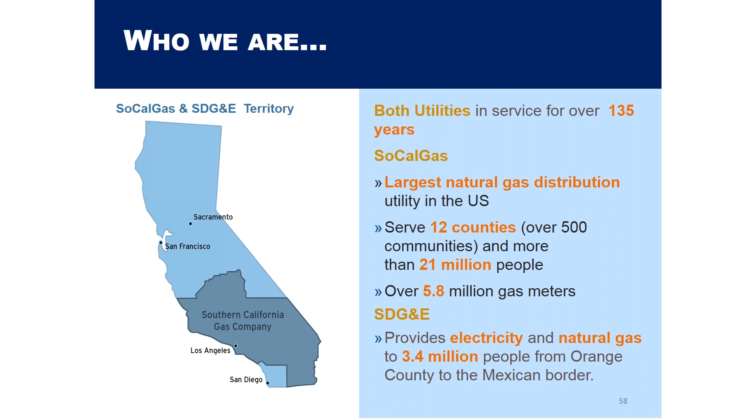Okay, so I'm going to first talk about who we are, give you some context, talk about RNG basics, which we've kind of covered a little bit today already, the case for RNG, and describe some of our projects. So who we are. We're the biggest, baddest, most bionic utility in the nation. Okay, so we serve almost 6 million customers. We've been in business over 135 years. We're old. And we have both San Diego Gas and Electric and SoCal Gas. We're basically the bottom half of the state. The top half of the state is typically PG&E, our friend in the north.

Okay, so let me give you some context here. So, everybody knows California is leading the nation in terms of our climate goals. In September, Governor Brown just signed SB 100, which bolstered the renewable portfolio standard to go from 50% renewable electricity by 2030 to 60% by 2030. We also have what's called SB 1383, which is a focus on the short-lived climate pollutants, which methane, of course, is one of, along with black carbon, the fluorocarbons, the refrigerants. The goal is to reduce methane emissions by 40% from 2013 levels.

So that's the main policy driver there. The governor signed an executive order recently that says we're just going to transform the whole economy. By 2045 - we have to beat Paris 2050 by 5 years here - we're just going to transform the economy and go carbon neutral by 2045.

So that's what's happening in California right now. So okay, how are we going to get there? Well, we need things that are scalable and affordable to solve these issues. The wind, the solar, the hydro, albeit way more sexy than gas, is not going to solve it. We need to have some renewable natural gas, and somehow we're going to have to make it sexy.

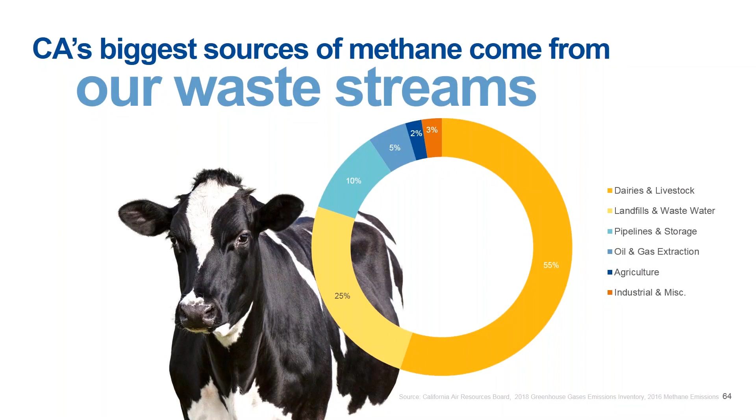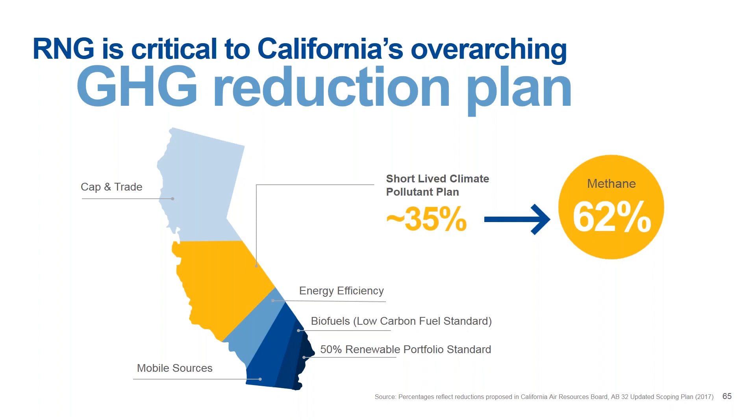So RNG basics, let's take a closer look. This is pretty simple, right? We're going to capture methane from the dairies, from the landfills, and move it into an anaerobic digester that will process it so it can meet pipeline quality specs and get it into our pipeline. So that's what we're trying to do.

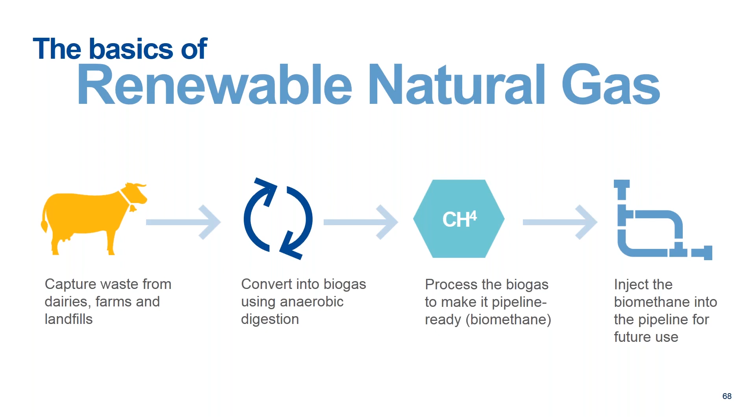We talked a little bit about this already, these terms that are flowing around. What is renewable natural gas? We say renewable natural gas is the methane produced from renewable sources like digested organic waste and gasified biomass. A lot of the inventories of what's available for renewable gas do not include the biomass, the forests. There's 130 million dead trees in California because of the drought, and none of that is being included in the potential for biogas or RNG in California. But there's some significant opportunity there.

Renewable gas - just calling it renewable gas - why do we want to do that? Because we do anticipate hydrogen. The hydrogen highway in California is real, we're trying to put in 200 hydrogen stations. We see an opportunity with power to gas. We talked about that earlier.

Power to gas is a way to convert excess renewable electricity that's being wasted today. In California, we are wasting and curtailing excess renewable electricity that's being generated during the day when there's no demand, and we want to convert that excess renewable electricity into a gaseous form - hydrogen, namely - or convert it back into methane and make renewable natural gas and put it back into our system.

Biogas is a biofuel that is naturally produced from the decomposition of organic waste during anaerobic digestion. Until biogas is processed to state pipeline standards, it's not considered renewable gas. Biomethane is biogas that has been cleaned to state standards and converted to biomethane, or renewable gas. So those are our definitions floating around, and we've heard some other concepts around that, but that's how we define it.

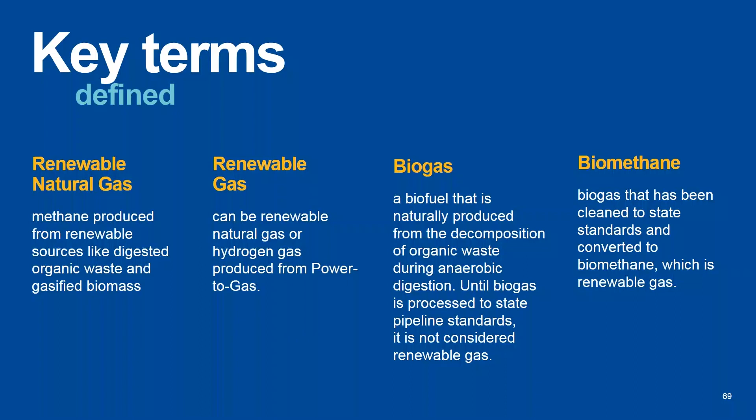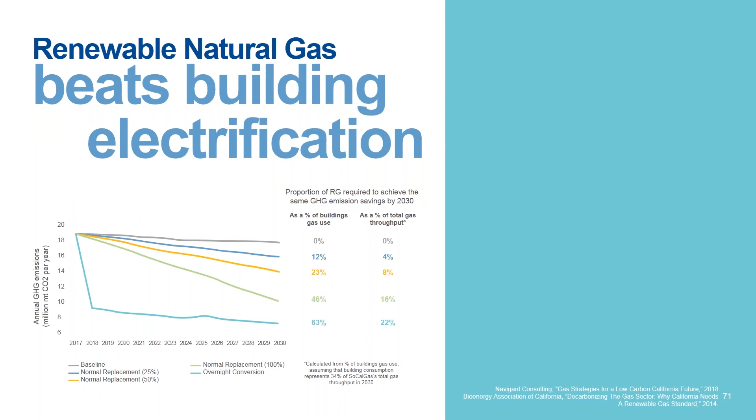So the case for RNG - we looked at renewable gas and how powerful of a tool this is for our greenhouse gas reduction toolbox, and it's big. We had Navigant Consulting do an analysis that found just 5% of renewable gas in our systems is equivalent to electrifying 30% of the buildings in California and getting those greenhouse gas reductions. That's huge. If we convert 16% of the gas in our system to renewable natural gas, that's equivalent to 100% of electrifying all the buildings in the state of California. So this is a big deal.

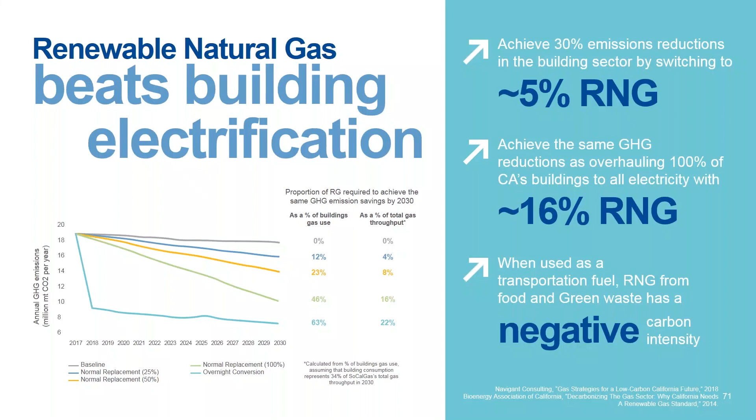We could get a lot of reductions, and as we learned this morning, it can be carbon negative. If you use food and green waste and dairy waste in the transportation sector, that's carbon negative - we can literally start reversing the process. So this is a huge opportunity and tool for us to go after the greenhouse gases.

So increasing renewable energy in any form is going to cost money, and we need to invest in that. We all know that we need to invest in it. It's a worthwhile investment. So the debate is, how do we get there? How do we do it in a more practical way?

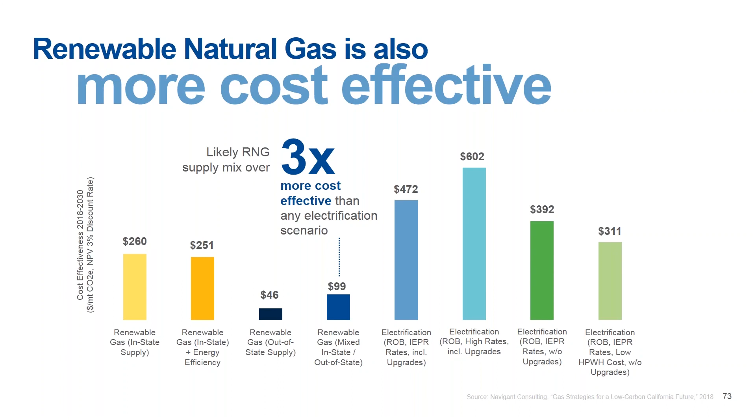So in that same study, they looked at it and they said it's about 3 times more cost effective to use renewable natural gas than to electrify everything. So that is a real key component. If you are able to use both in-state and out-of-state resources of renewable natural gas, it's 3 times more cost effective to get those same greenhouse gas reductions than if you electrify it. And face it, it's more practical.

I mean, if you're thinking about 10 million gas meters in the state of California, and let's say you want to convert 30% of those to all electric households, how practical really is that in the next 10 to 12 years? That's hundreds of thousands of conversions a year. And as a consumer, if you think about it, 90% of our households in California, in our service territory, have mixed fuel homes today.

So how many of them are going to go, yeah, go ahead and disrupt my household and upgrade my panel, and I'll go ahead and pay that $7,200 extra to get my panel upgraded? It's just not practical. People prefer natural gas. They prefer it for cooking. It's not a practical thing. It's pie in the sky, and we need practical solutions.

There may be some people that are like, hey, I want to do this, and they could do that today. You could go electric today, but there's a reason why they're not. There's a reason why there's 90 out of 100 households that are mixed fuel. And a lot of people aren't talking about the resiliency issue. That people need a hedge.

Most of these climate change events that are occurring today, they're above ground, weather-related events. What infrastructure is above ground? It's the electric infrastructure. What infrastructure is susceptible to these wind events, to these heavy storms, to the hurricanes? How much do you hear about people having natural gas outages in Hurricane Irma and Hurricane Michael? You don't hear about that. You hear about power outages. You hear about extended power outages.

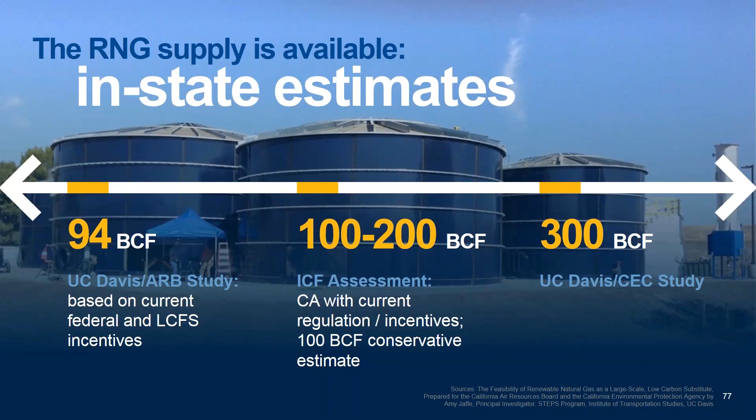Okay, now the big question is, is there enough renewable natural gas? That's been a big thing. There's not enough of it. Of course there's enough. We make a lot of waste. We have a lot of waste in this country. There's enough renewable natural gas. We have different studies that have put it at anywhere from in-state 90 BCF all the way up to 300 BCF. These are different studies, California Energy Commission, California Air Resources Board, UC Davis. So we've got this huge range in state.

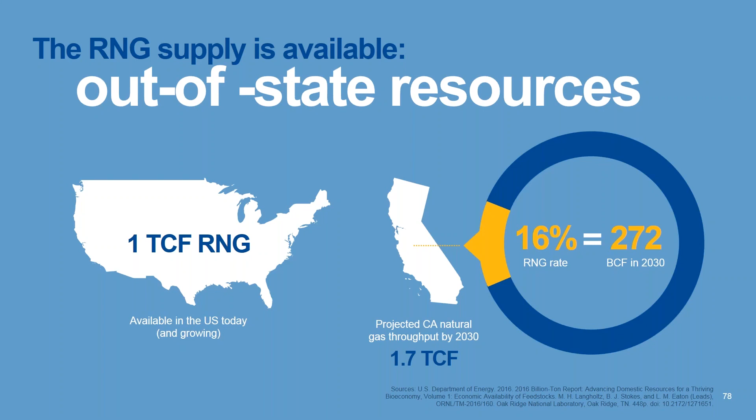Out of state and across the nation, it looks like around 1 trillion cubic feet. The state of California, in the future, will consume about 1.7 trillion cubic feet of gas. If we're able to displace 16% of that with renewable, that's about 272 BCF. Yeah, we've got enough. We make enough waste. We could do this.

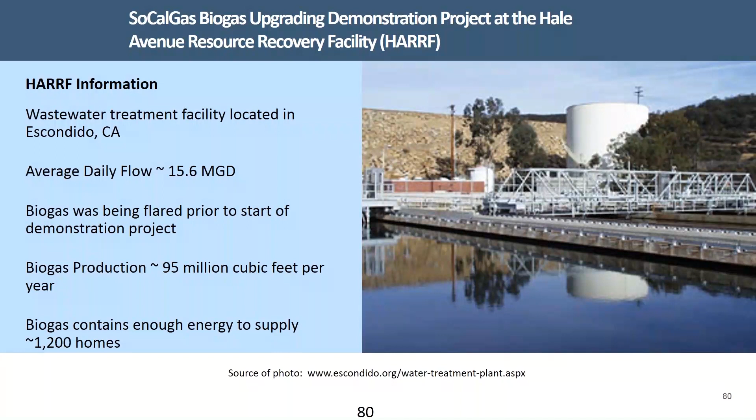But is it feasible? You know, we've been involved in this for a while. We demonstrated wastewater treatment back in the 2012 timeline in Escondido. We had a wastewater treatment plant. We demonstrated the technology. The technology is available. The cleanup is available. Like somebody said before, this technology has been around for a while.

And in fact, SoCal Gas is one of the first to accept landfill gas into its system years ago from Palos Verdes. Point Loma has been in play since about 2012, 6 years now. We've been monitoring Point Loma. They're meeting our higher BTU value. The 990 is our minimum BTU value, which we have been able to get a deviation from. So earlier we talked about how some of the RNG is a little lower BTU.

We've looked at that. The California Council on Science and Technology looked at it for our biomethane proceeding, and we do think we could take in a 974 BTU into our system without having any repercussions. It's very interchangeable. But Point Loma has been meeting that spec for 6 years.

They've been meeting the siloxane specs. They have used that energy, that RNG, to fuel cells at UC San Diego and at the South Bay Water Reclamation Plant. So they're putting that through fuel cells. It was a heavily subsidized plant at the time, but it's working great. It's doing well.

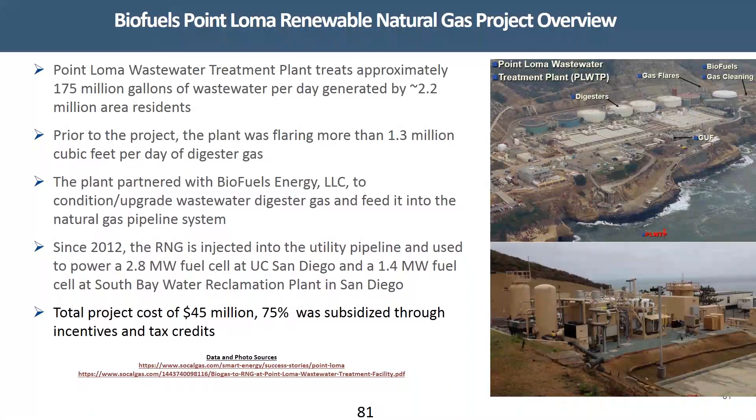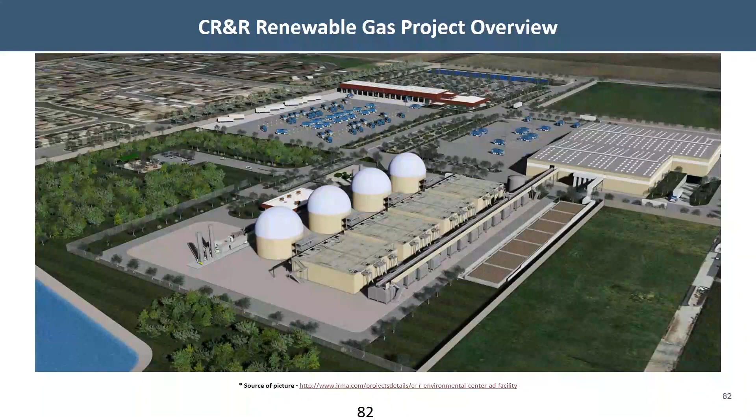They're taking advantage of the RINs, but they've pretty much been able to do it before that. They've put in anaerobic digesters, and they're diverting organic waste. So CR&R is turning greenhouse gas laden organic waste into carbon neutral renewable natural gas.

They're using the new near zero trucks for all their waste hauling, which is a major reduction in greenhouse gases from diesel, and from NOx. The NOx emissions are just dramatically reduced.

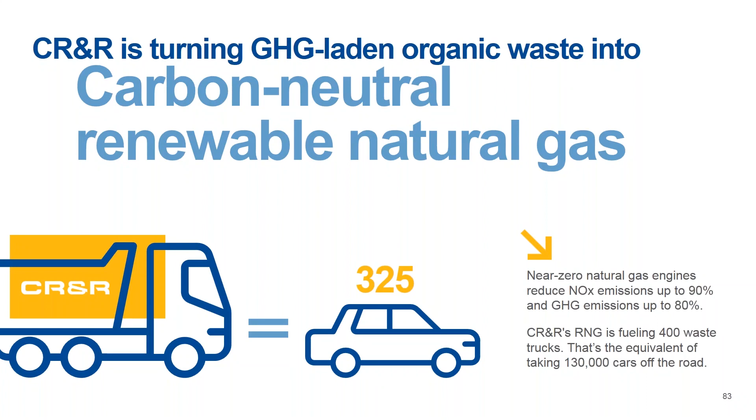So they've got about 400 waste trucks that they're using RNG on. Every waste truck use of RNG is equivalent to about 325 gasoline equivalent cars off the road. So they're taking off about 130,000 cars off the road equivalent. So major reductions from RNG.

So we are developing more of the market. There's about $110 million right now from the California Department of Food and Agriculture to support dairy gas projects. Dairy gas is a huge carbon negative, as Brian and others have talked about. I mean, negative 200 and something is the carbon intensity of that. That's huge, and we're helping get that biogas into our system.

And ultimately, we have to think globally, right? We in California only represent 1% of the global greenhouse gas emissions. So why are we doing this? We're doing this because we need to solve the other 99%. And we need to do it in a way that's practical, that's scalable, that's affordable.

For example, California's greenhouse gases, about 9% of it comes from its agriculture. Well, on a world scale, that's about a quarter of the greenhouse gases come from agriculture, so about 24%. So what we're doing here is something that we could translate easily to the rest of the world and help reduce their greenhouse gases and make a real dent into this problem. So we need to think bigger, and we need to be able to innovate so that we can solve it at a global level.

What's standing in our way? There's a lot of confusion about the supply. Some people and some organizations think there's not enough RNG, and it's like, believe me, you put enough incentives, they will build it, and people will come. It's like Vegas, right? Short-term thinking, people don't realize that we need to invest in the research. We need to invest in power to gas. We need to invest in carbon capture and utilization.

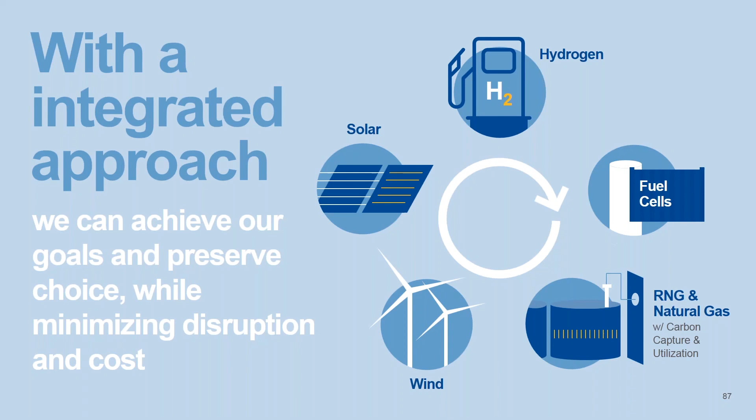So to reach our climate goals, we need renewable natural gas. We need to have the agencies, the regulators to support the initiatives for capturing methane from waste streams, to set procurement standards. Brian talked about SB 1440 that just passed in the state of California, which basically has the California Public Utilities Commission consider a procurement or renewable gas standard for the IOUs there. We need to develop the market for renewable gas, and one way to do that is to create the mandate, just like the electricity side, right? They got their RPS. We need a similar thing to help the developers know that there's certainty in the market and that they should be investing in it.

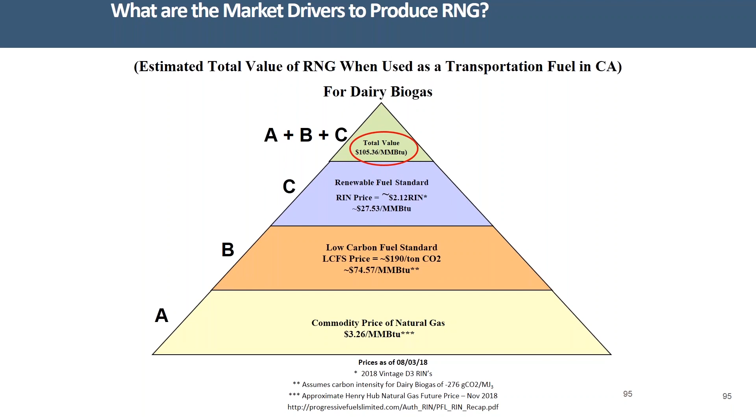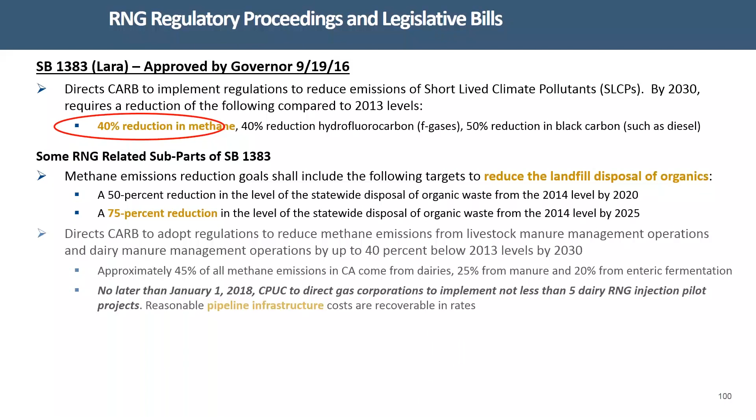We had a Power of Waste conference a couple weeks ago, and some of these are from there. So I just want you to know that that's available. When you do get this and have time to go through it, there's some really good nuggets in here if you're interested. Okay? Thank you.

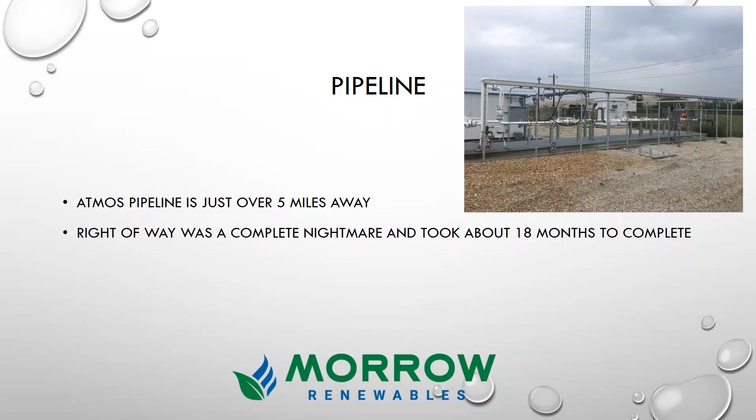But we ended up working everything out, getting our right of way, getting it in, having fun with the city of Melissa with their tree permits, which I don't know if anyone's dealt with that, but it's kind of interesting. Now I have 6 feet of pain and suffering.

We put in our line, we tied in, and part of the plan was there's not enough demand on the line that we're tied into. So Atmos was tying 2 other lines together to drop our gas off. And right when they were getting ready to build that, they realized that some of the right-of-way had lapsed right in the middle of the city of Frisco. So then they hustled and got that right-of-way secured and got us connected, but we had to wait on that. So we had to flare gas for a couple of months in that process, but it all got taken care of. Luckily, they did a great job of jumping on that.

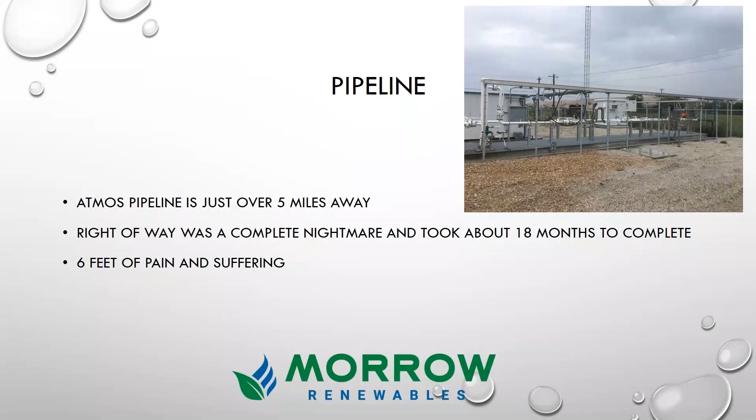Also, the pipeline actually has really good specs, 500 parts per million oxygen. The best specs we see are 2,000 ppm typically. We can actually do that, run a field, and get into the pipeline with no trouble at 2,000. 500 is tougher. So at 500, typically right now we have around 300 parts per million coming in from our field. But there are times when that's going to go up, you know, lines get hit, you bring in outside air, pumps over pump.

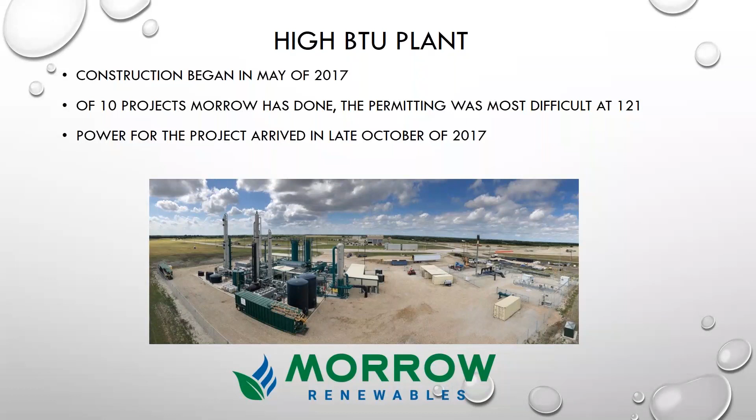Power for the project, this is always an issue. We were supposed to get power in May. It showed up at the end of October. I know I've talked to other developers having the same problems right now. We have a very large project in Houston that's about 8,000 standard cubic feet a minute, and we are waiting to get our primary power, and have been waiting, and we're supposed to have it in July. But I'm hoping that it comes soon because we're ready to run without that.

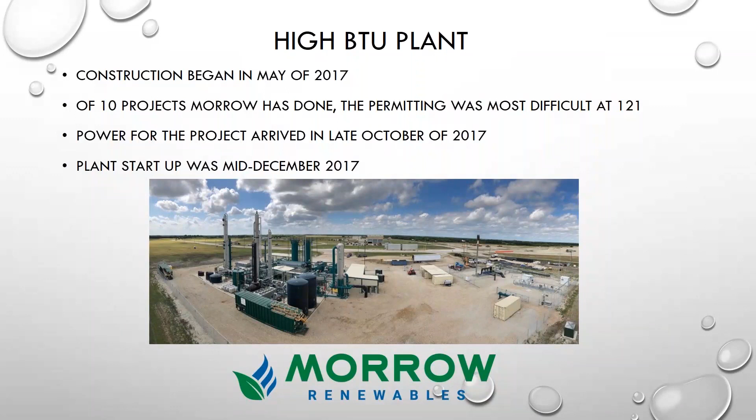So we started the construction in May. We started up in mid-December. Once power showed up, we were able to do our checking and start up the project, started selling gas. What the project is today: right now we're selling a little over 3,000 MMBtu per day of renewable natural gas from about 4,000 standard cubic feet a minute.

So that's, as I said earlier, we're at plant capacity. All the RNG is going to the vehicle fuel market under the RFS2. We're selling the gas to Shell. It's being transported through Atmos system, and they've been a great partner in that. So what we're doing right now is we're adding blowers to increase the suction on our screw compression on the front end, and we'll increase the capacity to about 7,000 standard cubic feet a minute.

We're also making some process changes in the plant. The water district, this is something that's interesting. They're anticipating 5% annual growth per year at the site, so it's going to grow very fast. That whole area is really blowing up and going north. So we're in the process of trying to be ahead and catch up. In fact, right now we're installing almost 6,000 feet of 24-inch polypipe to increase the size of headers to get more vacuum at the back of the landfill, so we can collect all the gas that's there. So, good problems to have.

Project learnings: right-of-way is becoming more and more difficult to get. So if you're a developer, it's never too early to start on your right-of-way. Also, it's never too early to start on power. We always start on power, and we tell them we need power at least 5 months earlier than we really do, and then they're about 7 months late. So that's pretty typical. So you can never start too early.

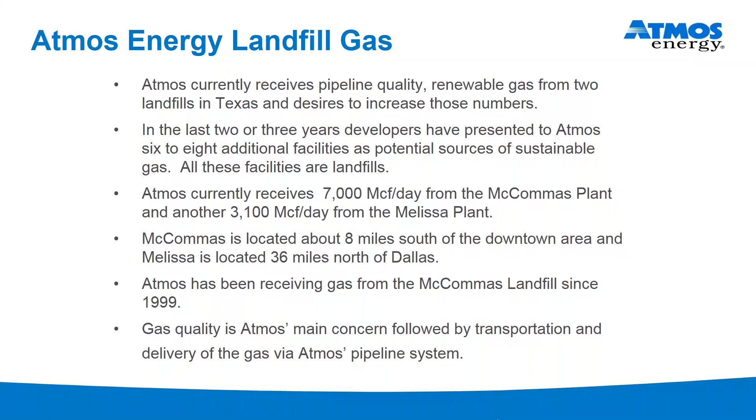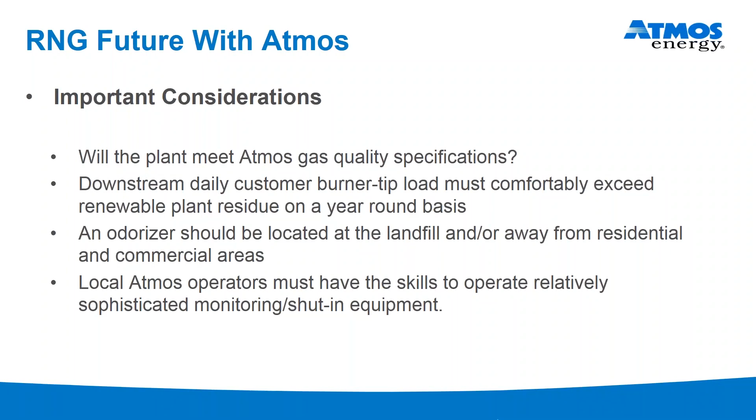We check for the following items: water, H2S, CO2, N2, O2, BTU. So there'll be monitoring equipped for all those things. ATMOS has, I guess, a relatively low BTU spec - it's 950. I think some of the other things I've heard this morning, they may approach 980 or 990. But gas in our system already is usually pretty close to 1,000, 1,010, 1,020.

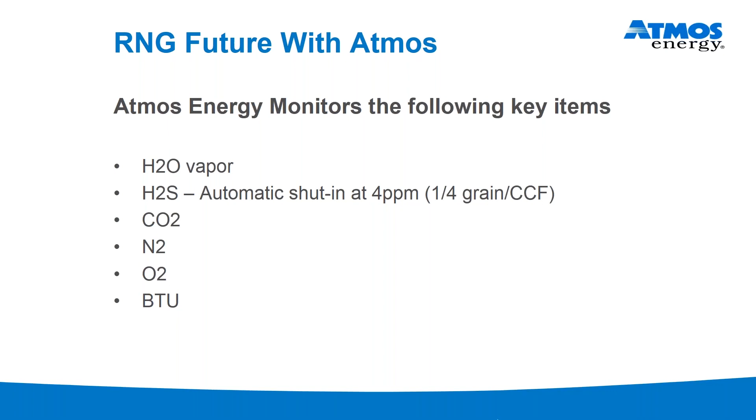It's not a problem. If you went onto our website, you would pull up our current gas quality specifications - pretty easy to find. Just go to your favorite search engine and put in Atmos gas quality specifications. This will pop up. Those are the specifications we ask our landfills to meet, which is really no different. As Luke mentioned, our current spec is 500 parts per million, or where the oxygen spec is.

0.05% by volume. One of the curious things going on right now - make a little diversion, chase the rabbit - these LNG facilities being put in along the Gulf Coast, these liquefaction facilities, are looking for a lower oxygen spec, like 10 parts per million. And Atmos is considering, where we have deliveries into some of these interstate and intrastate markets that go down the Gulf Coast, adjusting those specifications to match what other people are doing.